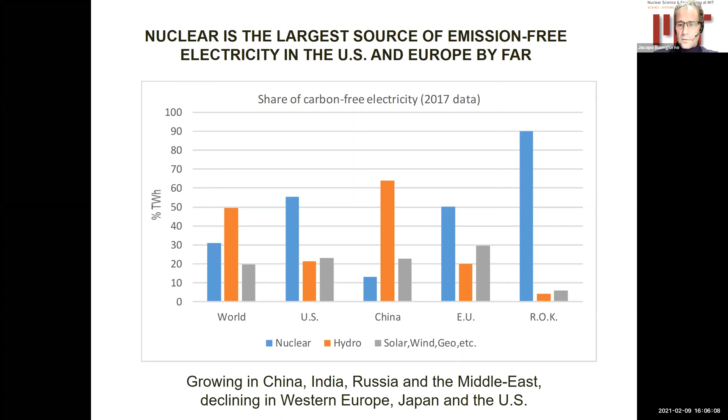In places like China, they rely disproportionately on hydro. And in the EU, similar to the US, and a place like the Republic of Korea, where I gave a similar presentation, nuclear accounts for almost the totality of their carbon-free electricity. So nuclear already plays an important role in our clean energy infrastructure. What are the trends? Well, we see certain growth in Asia, in particular China, India, Russia, also the Middle East. And frankly, at the moment, we're seeing a decline in Western Europe, in Japan for obvious reasons, and the United States.

It's interesting, the debate now about decarbonization of the electric grid has many different positions, and sometimes it's hard to understand where the truth or where reality really lies. So I like to use this slide, which is from a study conducted in Europe a few years back, to show the value of nuclear and renewables in decarbonizing the electric system.

Europe is an interesting place to do a clean analysis of what technologies work, because it's 20 plus countries. Each country has chosen a different energy mix. However, they're all more or less integrated in a big continental grid. And so you can really see what worked and what didn't work. So that first plot there shows the share of essentially solar and wind renewables generation over a period of one year.

And the average in Europe over that period was about 20%. And there were 6 countries that are at or above that average. They are Denmark, Ireland, Germany, Portugal, Spain, and Finland. So those, by definition, are the countries that have invested the most in solar and wind in Europe.

What I'm going to show you next is a list of the same countries, but now they're ranked according to the carbon intensity of their electricity sector. Carbon intensity is the amount of CO2 emitted per unit electricity generated. So the units there are grams of CO2 per kilowatt hour. And obviously a low number there is good. Just to give you a reference, the world average is about 500 grams of CO2 per kilowatt hour.

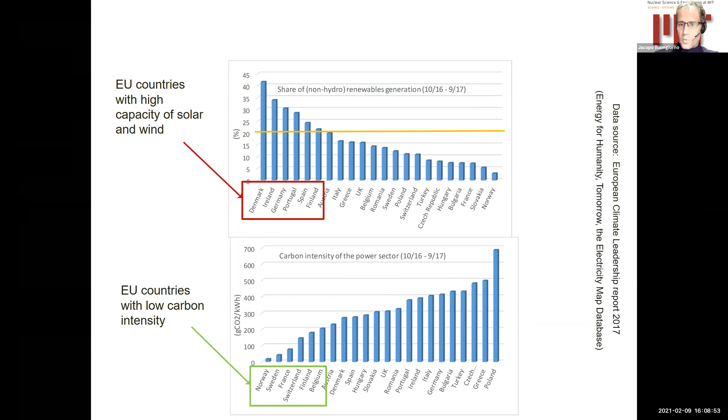But what do the countries at the bottom have in common? They have been able to decarbonize quite nicely their electricity grid, either by nuclear or hydro, or a combination of both. So empirically, what has worked best in Europe is a combination of nuclear and hydro. So the implication of this is that the first priority for countries in Europe, but everywhere in the world, if they have nuclear power plants, is don't shut them down.

Because we've seen, for example, here in the US, in states like Vermont, Wisconsin, Massachusetts, California, Iowa, etc., that when you shut down an existing nuclear power plant, it is typically replaced with natural gas and a little bit of renewables, and the emissions will go up. There is just no way around that. So when you shut down nuclear power plants, emissions go up.

We wanted to look at this not just from an environmental point of view, but also from a cost point of view. And so we looked at the example of Spain, which is an interesting one. Spain has about 7 gigawatts, 7 reactors now operating. Their licenses will expire over the next 10 years. And the question is, do you make the investment to extend those licenses for another 20 years? Or do you shut them down?

And if you want to keep the emissions at a constant, you need to replace them entirely with solar and wind and storage, obviously, to accommodate the intermittency. So the numbers look like that table there in the middle, and let me just sort of parse them out for you. So the green box there are the numbers for the scenario where you're just relicensing the reactors. Okay, so it's not cheap, and basically it entails about 35 euros per megawatt hour additional cost of electricity. But you have to compare to the alternatives.

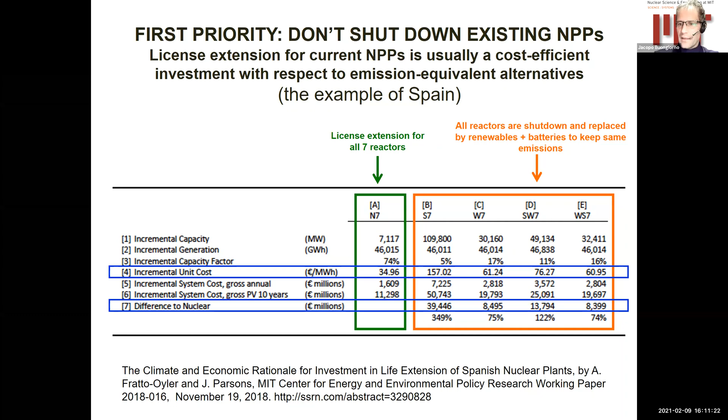Now, doing a little bit of decarbonization is not that difficult, particularly for countries that have coal-fired plants. You shut them down, replace them with natural gas, and the emissions will go down a little bit. Maybe you bring in some renewables as well, and the emissions will go down a little bit. But the key issue here is how do you do deep decarbonization? Because again, remember, in the electric sector, we need to basically go down by an order of magnitude in emissions. So that's what we call deep decarbonization.

So what we've done at MIT is a study of many different regions of the world. And the one I'm going to show you here is a large province or a large region around Beijing in China, where we looked at the optimal electricity generation mix for different decarbonization targets.

So we have a model that has been developed and validated for several years now. It's called GenX, and it basically takes the hourly demand for electricity in a particular region. It combines it with the weather patterns in that region, so how much wind and solar can you rely on at any given hour throughout the year? It combines it also with the cost of construction, operation, maintenance, and fuel for the different generators on the grid. And out comes the optimal generation mix,

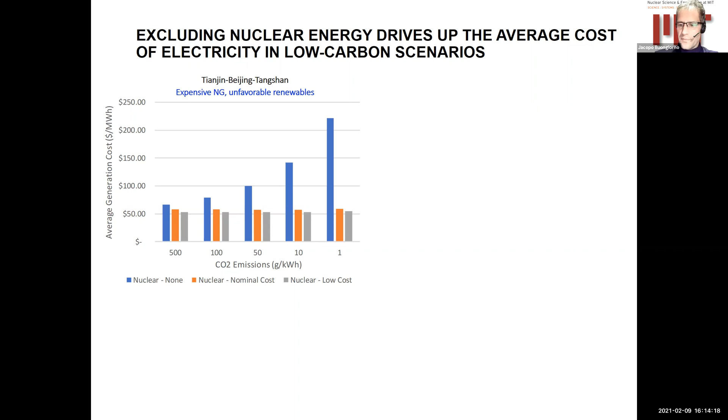If you exclude nuclear, your overall capacity has to grow dramatically as you try to decarbonize. Because if you're trying to decarbonize without nuclear, you're left with having to build a lot of solar, a lot of wind, and because of the intermittency, a lot of storage. And it's the aggregate cost of all those overbuilt infrastructures that really brings the average cost of electricity up quite a bit.

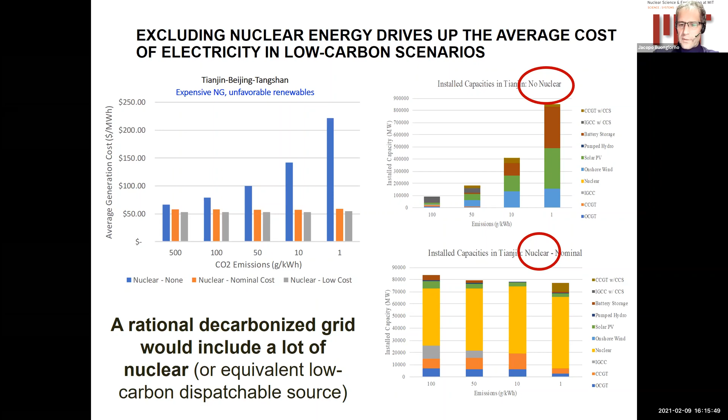So the bottom line of this whole study that we did is that an effective, efficient and rational decarbonized grid would actually include a lot of nuclear. And so that provides the motivation for saying, okay, we're going to need more nuclear. Now, what's the problem? Why aren't we building nuclear plants left and right like there is no tomorrow? Well, let me just give you the punchline before I walk you through this table: they're too expensive. It's really cost.

Now, there are other challenges for nuclear, no doubt about that. But if they were cost competitive, we would be building a lot of nuclear power plants in the US, in Western Europe, everywhere. So why are they expensive? Well, I call this a perfect storm of unfortunate attributes. As part of a study that we did a few years back at MIT, we compared the nuclear industry to other major industries, and we did that according to 4 categories.

First, the system size. What is the size of the machine, if you wish, or the system at the heart of that industry? A traditional nuclear plant is a big machine. Gigawatt scale, sits on like a square kilometer. Lots of civil works, a lot of concrete, big system. It's not unique in that sense. Chemical plants are also large. Offshore oil and gas platforms are large, but you have a big distribution here. You have other industries that rely on machines that are very small: automobiles, jet engines, consumer robotics, etc.

The second category was factory fabrication. Are these machines produced in a high productivity environment, such as a factory, or are they built, assembled in a low productivity environment like a construction site? Again, nuclear, unfortunately, traditionally is a construction site based technology. Not unique, but there are other technologies that are very heavily factory based.

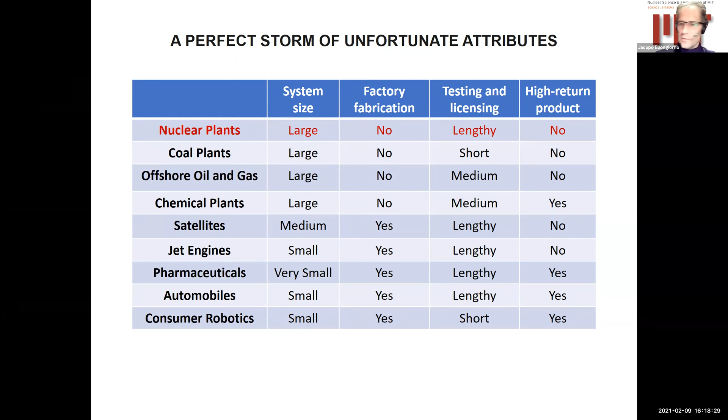Again, big difference. The bottom line of all of this is that the innovation cycle for nuclear, because of these reasons, has ballooned to the order of 15, 20 years and cost of the order of $10 billion. This is effectively the cost and the time required to bring a new nuclear technology to market.

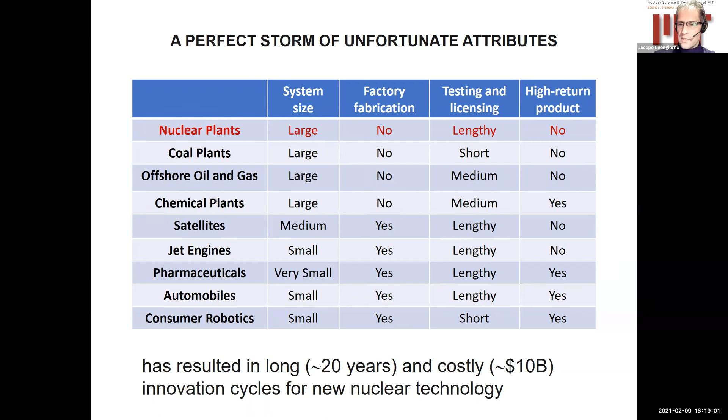Now, I don't need to tell you that if in this day and age you go to a bunch of investors and ask for $10 billion with the promise that maybe 10, 15, 20 years later you're going to make a profit, you're going to be laughed out of the room. So this model is no longer sustainable. That's really the bottom line.

All right, so what are the solutions? Well, I'm going to tell you about a potential solution. The potential solution relies on the fact that we need to shift the paradigm for nuclear development and deployment dramatically, 180 degrees. First, the machines have to be smaller and more serially manufactured. The model, in my opinion, is jet engines.

Number two, we need accelerated testing and licensing. It's absolutely not sustainable to take 10 years to go through a licensing process for a new reactor. And number three, very, very important, why limit nuclear only to grid connected electrons? There are many other markets that I will illustrate where nuclear can actually command a premium, a higher added value. Okay, and so economically much, much more attractive for investors.

All right, so smaller systems. I think the industry basically gets this. There is a lot of excitement about small modular reactors like NuScale or BWRX-300. Those are essentially miniaturized light water reactors, 300 megawatts and less. They tend to be simplified in design. They tend to have passive safety. All of that is good.

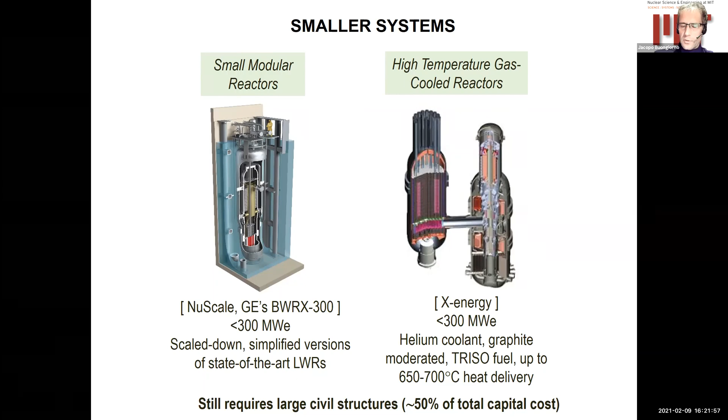So I think that's a little bit of an Achilles heel for these small modular reactors and HTGRs. And that limits the amount of cost savings that you can achieve with these machines. But absolutely, we should pursue them; in my opinion, they're more promising than the large light water reactors.

Or you can go to very, very small systems. And I know here at Illinois, you guys have been talking about this. This is not going to be a surprise. So these are the microreactors, but I'm going to call them nuclear batteries because they're really not just microreactors. They're microreactors with a certain set of features that make them ideal for penetrating new markets.

So what is a nuclear battery? Well, it is a microreactor. So let's say that it generates between 1 and maybe 10 megawatts. It's both heat and electricity. Crucially, it's not just electricity, it's heat. A nuclear reactor generates heat to begin with. A lot of markets require heat, as I will explain later. It's obviously carbon-free because that's nuclear. I think they have to be designed to be dry cooled so that they don't require any cooling water. That makes them geographically less constrained.

They're standardized reactor designs. They're absolutely factory built. Remember, the scale is a jet engine, and if you look at that image up there on the slide, you can see that that's exactly the scale we're talking about. So a machine of that type can be built entirely in a factory. It is delivered to the site in a standard container. It has some kind of energy conversion cycle. It could be an air breathing gas turbine or a small Rankine cycle. It's plug and play, standardized connection. So you're talking days, weeks, maybe a month to connect it to your local users, not the usual 5 or 6 years construction project.

For economic reasons, it has to be autonomous or semi-autonomous operation because it generates only a few megawatts. You cannot afford to have 100 or 50 or even 20 operators on site. It has to be basically an autonomous system. Interestingly, it has to be designed to be off-site refueled. So maybe it can operate between 3 and 5 years, just to be on the generous side, without refueling.

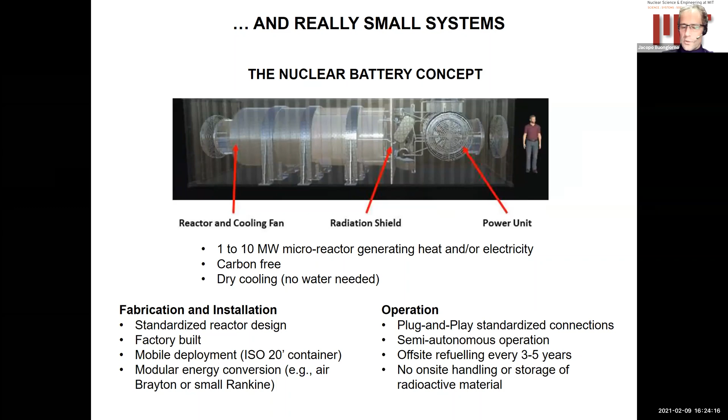So the customer gets the nuclear battery on the site, uses the electricity or the heat, and then once the battery is exhausted, so to speak, that battery is sent back to a central facility where it's refueled and refurbished. The very important implication of this is that there is no need for on-site handling or storage of radioactive material. So the customer doesn't have to mess with either the front or the back end of the fuel cycle, which also from a proliferation point of view is a good thing.

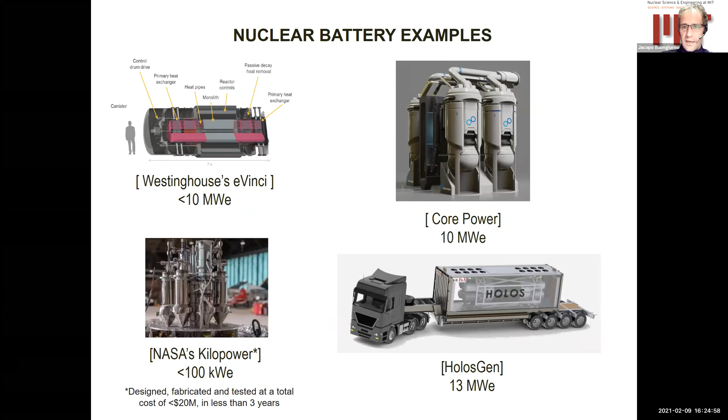So these are some examples of the nuclear battery designs that are being developed. Westinghouse is one, Core Power, this is for marine applications. HolosGen was proposed for the Army. At Illinois, you looked at USNC, which is another one. And then my favorite, for the simple reason that it has already been demonstrated, is a nuclear battery for space applications. It's called Kilopower. NASA and Los Alamos designed, fabricated, and tested this for less than $20 million and less than 3 years, between 2015 and 2018. So this can be done. And these are the scales that we're talking about. We're talking less than $100 million, maybe $100 million, and less than half a decade, not 10, 20 years as usual.

And it has a predictable generation cost over the lifetime of the asset. Once it's built, you know how much your electricity or heat are gonna cost over the lifetime of the machine. And then they have to be designed to be really ultra safe, rugged, robust, to be deployed in urban environments, semi-urban environments, and so on. All right, so the nuclear battery is actually not an entirely new idea. Back in the 1960s, the U.S. Army actually did have some nuclear batteries.

They didn't call them nuclear batteries, but they were portable reactors of the order of a megawatt, a couple of megawatts. What has changed since the 1960s to now is a whole suite of technologies that can actually enable the design and construction of a modern nuclear battery. So these are things like advanced gas turbines, additive manufacturing, new materials and sensors, robotics, artificial intelligence, et cetera. All of that is going to contribute positively to the development of a nuclear battery for the

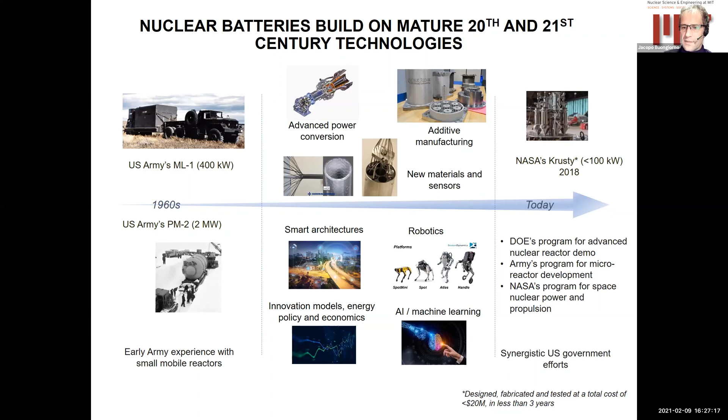21st century. And then also what gives me hope that this is feasible is that there are massive synergies with other DOE, other government programs in the United States in particular, that are aimed at developing advanced reactors in general. And so there is money, there is motivation, there is support, bipartisan support in Congress. DOE has a program for advanced reactor demonstration at the Idaho National Lab, among other sites. The Army program for microreactors also put several $100 million on the table, and then NASA, which I already mentioned.

Now, where would the accelerated testing and licensing come from? Well, it comes from the superior safety profile, if you wish, of these machines. And what do I mean by that? If you're familiar with traditional light water reactors, and even the newer versions like AP1000 and so on, you recognize here on the left some of the features that make these machines uniquely robust. First of all, there is no need for emergency AC power to deal with decay heat removal or reactor shutdown. There is no need for operator intervention. The designs are simplified and the operations are simplified, so there are fewer chances for human error.

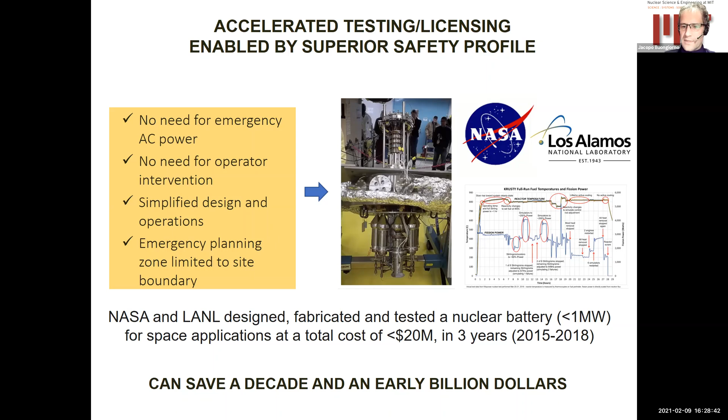And then last but not least, the emergency planning zone can be limited to site boundary. That's because the source term and the barriers, the containment structure and the fuel forms are such that under no credible scenario you would have a significant release of radioactivity into the environment. So once again, the model is this Kilopower KRUSTY by NASA and Los Alamos that I mentioned, and that was, like I said, tested in 3 years. So this can save literally a decade and nearly $1 billion. And if you're familiar with investment dynamics and startups and so on, the so-called valley of death in the first few years is one of the biggest hurdles to get over. And if your valley of death is not a decade and $1 billion, but it's 3 years and $100 million, that changes things quite dramatically.

Now, the last piece of the puzzle is how do I add value to the products from a nuclear battery or from nuclear in general? So higher added value can come from one of two scenarios. One is there is a strong policy signal that recognizes that nuclear electricity is more desirable than other forms of electricity or heat, because it's non-emitting, because of its high economic impact, because it's stable, because it contributes to energy security, etc. Well, that's all good, but it's unlikely that governments will suddenly fall in love with nuclear. And frankly, it's completely beyond our control as nuclear engineers.

The second option is much more interesting because it relies on capturing new markets. Once again, don't think power grid only, think beyond. And this is within reach with the right technology. And I would argue that these nuclear batteries are the right technology for capturing new markets. So let me tell you a little bit about that. I'm going to call this beyond the grid.

All right, so first of all, why does this matter? Well, the debate on decarbonization has disproportionately focused on the grid. But if you look at this pie chart, which shows the relative share of CO2 or greenhouse gas equivalent emissions in the economy, only about a quarter comes from electricity. 3/4 come from other sectors of the economy, things like industry, transportation, buildings, agriculture. Now, you might argue that some activities within these sectors can be electrified and therefore redirected back to the electric grid. But most actually cannot be electrified, and it would not be economically competitive to electrify. So we need to look at the grid, but also beyond the grid. Absolutely, there is much more than the grid.

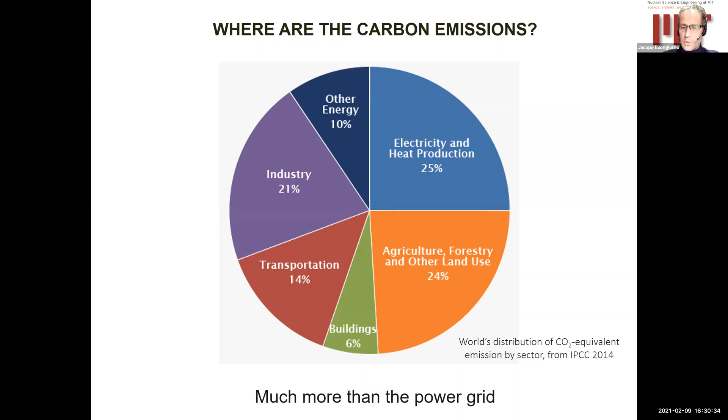All right, so what are we talking about? Well, first of all, heat more than electricity. It's a much, much bigger market. Factories, more often than not, require heat. They don't require electricity. Huge market. Transportation, charging stations for electric trucks or hydrogen vehicles. Electricity and hydrogen are not primary energy sources. They are energy carriers. They require a primary energy source to produce them. Nuclear can do that. Nuclear batteries can do that. District heating, desalination, microgrids of all types, whether it's towns, islands, military bases.

We're going to need a lot of big pumps for flood protection, particularly coastal communities because of rising sea levels. It's going to be a big market. Freight ships, propulsion. That is an industry that has committed to pretty serious CO2 emissions reductions over the next 10, 15 years. And nuclear is one of 3 technologies that they are seriously interested in pursuing for propulsion of freight ships.

Data centers, farms, not obviously the traditional open air farms, but containerized or portable farms, which are also called aquaponics or hydroponics. Indoor aquaculture, fresh fish. This is one of my favorite applications. In Dubai, they currently get half of their fresh salmon needs from local aquaculture. So made in Dubai or raised in Dubai salmon, which is incredible if you've ever been there. It's the last place on earth where you'd expect salmon to thrive. But of course, it's all indoor, and so it requires a lot of electricity for cooling and pumping water around.

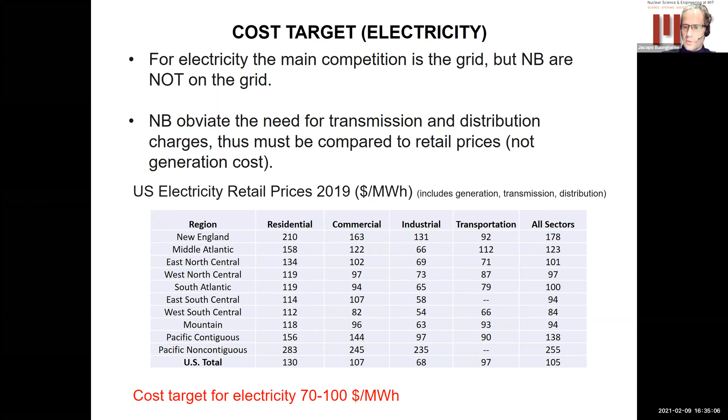So if you look at retail prices for electricity last year or a year and a half ago, including generation, transmission, and distribution, these are the numbers for different sectors and for different regions in the US. I'm not going to go over these numbers. The bottom line is that if you can generate electricity for $70 to $100 per megawatt hour in the United States, selling directly to customers, you're actually going to be competitive against the grid. So that should be your target.

What about heat? Well, heat is a different beast. We don't have a national grid for heat. Heat is always locally generated. And the main competition there is natural gas fired boilers. Now, natural gas is pretty darn cheap in the US, okay? So this is a tall order. So I'm going to show you what the numbers look like.

Now, the good news for the nuclear batteries is that natural gas boilers are too small for carbon capture and sequestration. So burning natural gas will incur a carbon tax if you are in a carbon-constrained world, okay? So this is what the numbers look like. On the y-axis, we have the cost of heat in dollars per megawatt hour heat, and on the x-axis, you have the price of natural gas in dollars per million BTU.

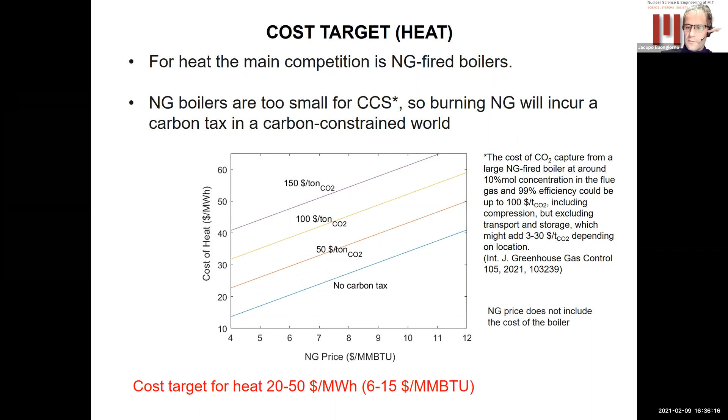The blue line at the bottom is the line without a carbon tax. Okay, and then if you add a carbon tax of $50, $150 per ton of CO2, then of course the cost of heat coming from burning natural gas goes up. And so this plot basically suggests that if you can produce heat at $20 to $50 per megawatt hour, which is equivalent to $6 to $15 per million BTU, then you're going to be competitive against natural gas boilers. So keep those numbers in mind.

All right, so what are the economic imperatives for these nuclear batteries? Well, first, to access large markets, the nuclear battery must be licensable for deployment in population centers or near population centers. The markets that I showed you a few slides ago, those are not niche markets. Those are not middle of nowhere markets. Those are big markets, and they are in cities or near cities or coastal environments, etc. So you have to design a system that can be licensed and operated in a population center, essentially.

From a cost point of view, we've done a levelized cost of electricity and a levelized cost of heat analysis, which suggests that the nuclear battery can meet the heat and electricity cost targets that I just described a few minutes ago, if the following happens. First, the power output has to be maximized within the nuclear battery constraint. So economy of scale applies also to very small reactors.

What I mean by nuclear battery constraints, it means the system has to be truck transportable, for example, and the decay heat must be removed passively. Those are the constraints. Within those constraints, you still want the largest power output that you can get, because a lot of the costs are inversely proportional to the power output.

The second requirement there is that the size of the staff is minimized. Again, you cannot afford to have a lot of operators for these machines. The current fleet of nuclear power plants runs at around 0.5 full-time employees, FTEs, per megawatt. For these nuclear batteries, maybe you can afford a little bit more, 0.5 to 1.5, doesn't break the bank. But you do the math. If you have a machine that generates 10 megawatts and you have 1.5 FTE per megawatt, that means the most you can afford is 15 employees per reactor. Okay, if you go above that, forget it. You're not going to be able to meet those cost targets.

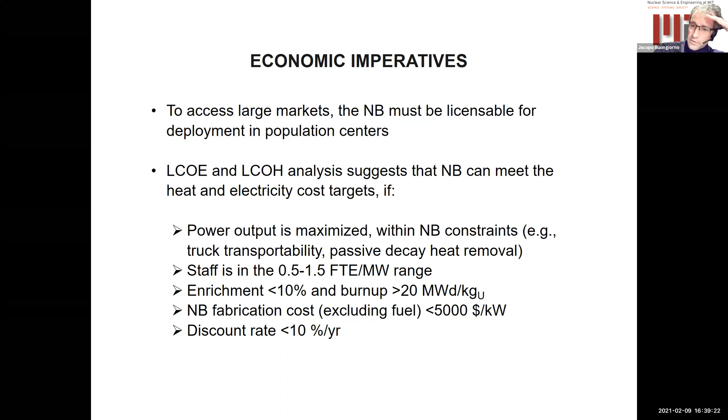And then lastly, of course, the fabrication cost has to be reasonable, less than $5,000 per kilowatt. Once again, think about the jet engines. A large jet engine costs $25 million, and it generates 50 megawatts of mechanical work at takeoff. That amounts to $500 per kilowatt. That's pretty darn cheap. And here we're making the assumption that our nuclear batteries have to be $5,000 per kilowatt, an order of magnitude higher. Okay, so I think this is quite feasible.

If you remember, the cost target for the nuclear batteries for electricity is between 70 and 100. So you would be comfortably within that cost range. So that's pretty good news.

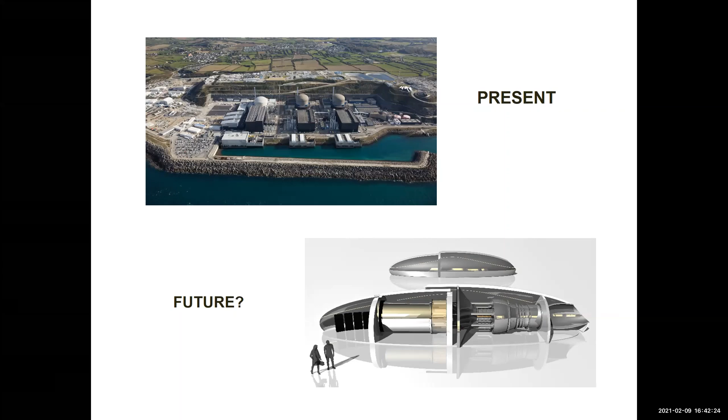Countries in Asia, Middle East, they're good. They build large nuclear power plants. They deliver them on time, on budget. God bless them. Keep building them. But in the U.S., maybe the future of nuclear looks more like that machine that I'm showing at the bottom there. So sleek, small, factory built, and can deploy in weeks or months as opposed to 2 years. So with that, let's see if there are any questions.

Thank you very much, Professor Buongiorno. I'm really excited to see that you and many of the Illinois folks share the same vision and excitement about the smaller reactors, microreactors and nuclear batteries. Okay, with that, I'm gonna open the floor for questions. Any questions from the students?

By the way, incredibly, I kept to time, 40 minutes. Yeah, perfect timing. I'm very proud. Any questions from the students?

While waiting for the students to think about a question, let me ask you one question. So in order to achieve the goals that you set up here, what are the main technological challenges that you see at this stage that need R&D, especially at the university level? Yeah, that's an excellent question. Let me use this slide to maybe guide the conversation a little bit.

So as far as the nuclear technology is concerned, in order to get a compact core with a good neutron economy, we're going to need a good moderator. You can't go with graphite. The power density is going to be just too low. And so you end up with a large core, or for a given constraint, because of truck transportability, you're going to end up with a very small reactor power, and that kills you on economics. So a solid moderator or a high efficiency moderator, which of course is not water, because you have to be able to operate these machines at higher temperatures, that is an imperative, I would say, number one.

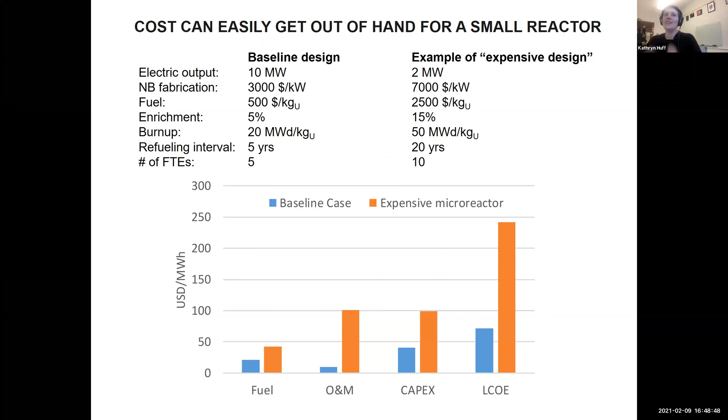Any questions from the students or faculty? I have one since the students are silent. So you had this great table of dozens of potential heat applications. Very cool stuff. Exciting. Maybe you mentioned it, and forgive me if I missed it. It looks like you looked at the heat load. My question is this: did you do any categorization about the temperature at which these processes occur? Absolutely. That's a great question.

So clearly, if you go with an LWR, you're not going to be able to meet that demand. In some cases, you are, by the way. Paper and pulp, they need 120, 130 degrees C. In other cases, you can't. But this was all less than 500 degrees C. And at that temperature, you get a big chunk of the market. You obviously don't get it all because things like steel mills and cement, those are too high. So you wouldn't be able to catch those.

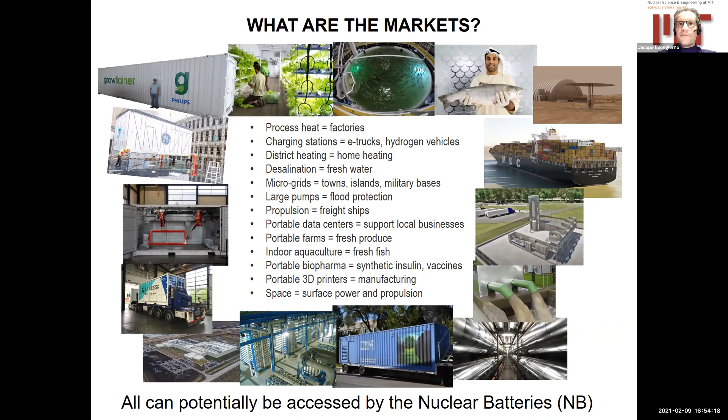Okay, so I would like to follow up on the previous question. Do you envision any significant change when electric cars become dominant? What kind of change are you referring to? The composition, the percentage of different energy sources. I see. Let me see if I have it in the backup slides. Yes, over here. This is the one I wanted.

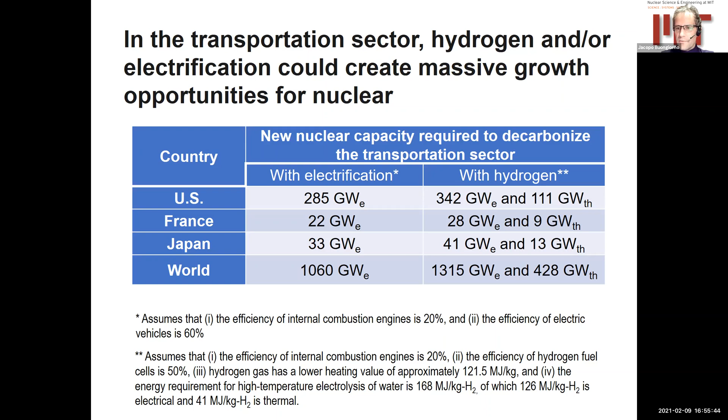So where is all this energy coming from? It's got to come out of primary energy sources: nuclear, natural gas, solar, wind, geothermal, etc. So the short answer is yes, things will change because we'll need a lot more electricity if we want to electrify the transportation sector, and that energy has to come from somewhere. My hope is that a good chunk of that new energy will come from nuclear. I see. Thank you.